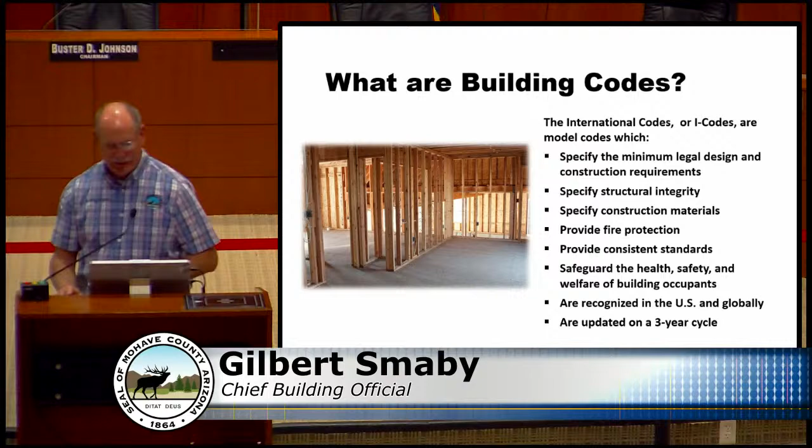Thank you for attending. What are the building codes? The county has adopted the international building codes.

We used to have the uniform building codes, and then nationally the I codes came into effect about 2000, with the first code in 2003.

The current building codes specify minimum legal design and construction requirements. They specify structural integrity, construction materials, provide fire protection, consistent standards throughout the building industry, and safeguard health, safety, and welfare for building occupants, and are recognized throughout the United States and globally.

They typically run on a 3-year cycle, so every 3 years the codes are updated by the I code family. And again, we're under the 2012 code currently.

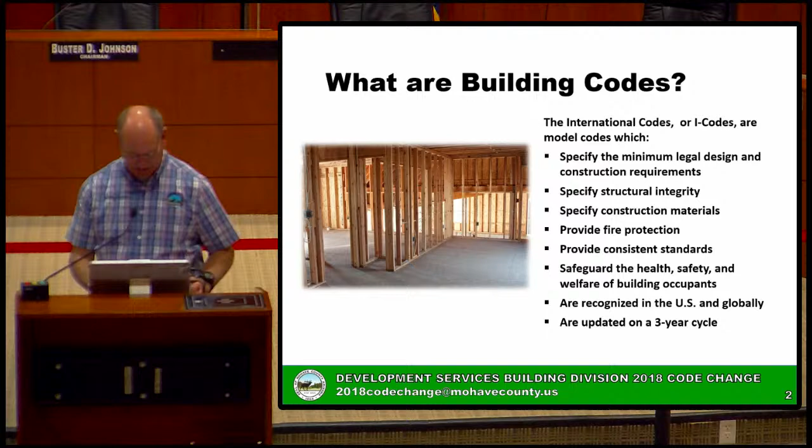Currently the county, Mohave County, is under the 2012 code. We adopted this code by the supervisors approximately May 2015, and it became effective for enforcement in June 2015.

We actually were on the 2006 code prior to this. The 2009 code came out, but with hard times in construction and the downfall of the economy, we did not adopt the 2009 codes. So we actually skipped a code from 2006 to 2012.

And again, we're looking to go to the 2018 code. There is a 2015 code that came out, and again, because of the complexity of going to the next codes and the cost, most jurisdictions skip at least one code. So we're going to go from the 2012 to the 2018.

Why should we change codes? Through the adoption of building codes, we can achieve lower insurance costs, lessen damage from fire and natural disasters, avoid criminal and civil lawsuits, and ensure the safety of family and business.

Another reason for changing codes is that most jurisdictions stick with the State Fire Marshal's Office for the state of Arizona. The State Fire Marshal's Office has notified people that they are going to the 2018 code within the first half of this year. So all the fire jurisdictions have to be on the same state code and can't lag behind. If we stay behind on the building codes, there are some conflicts and confusion between the codes. So again, most all the jurisdictions in Arizona are going to the 2018 codes.

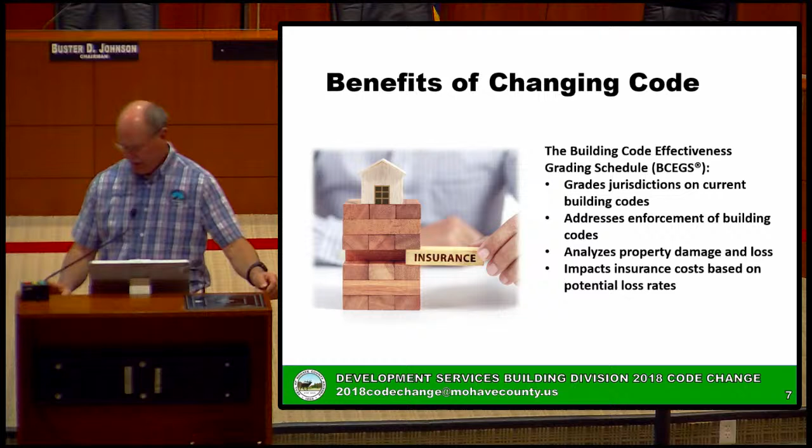The BCEGS rating also analyzes property damage and loss, and impacts insurance costs based on potential loss rates. Another aspect of the ISO rating, besides the BCEGS, is the National Flood Insurance Program, which conducts a community rating system. This rating system affects floodplain management and provides discounted premium rates for reduced flood damage and construction related to potential damage.

In the last 10 years, we received over $7 million in grant funding by having a low CRS rating and a low BCEGS rating, which affects that ISO rating.

What's our current ratings? On the BCEGS rating, 1 is the best and 10 is the worst. Mohave County currently has a residential rating of 4 and a commercial rating of 3.

We would have a rating of 3 in residential, although the state mandated that jurisdictions in Arizona can't require residential structures to be sprinklered. So by the sprinkler rating, we jumped up one rating from a 3 to a 4.

The CRS rating, or the floodplain management rating, is currently a 6. I believe we were just audited for that and received that number. We are yet to be audited for the BCEGS rating, which will happen later this year.

If we do not adopt the 2018 codes, the Mohave County BCEGS rating will increase to a 9 for residential and increase to a 9 in commercial. It will also increase 1 rating on the CRS rating for our flood control and our grant funding possibilities. So there's substantial increase if we do not adopt the codes.

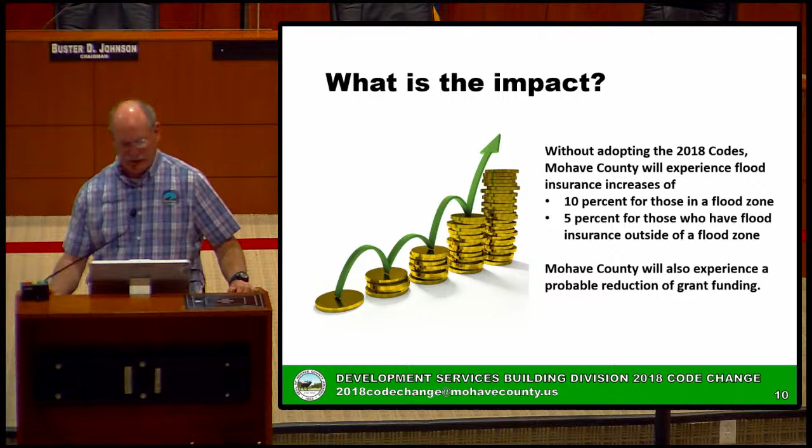When will the change take place? Again, the Board of Supervisors has directed us to start the process with community input meetings. With those meetings, we'll be compiling possible amendments and likes or dislikes of the code, and those comments from the public will be brought before the Code Advisory Board for a workshop and discussion with the public and the board.

We'll compile the possible amendments or recommendations from the Building Code Advisory Board and bring those to the Planning and Zoning Commission for their approval, and then later to the Board of Supervisors for their approval. If adopted, the new codes will take effect sometime in the summer of 2021, and a transition period will be established between the code change from the 2012 to the 2018.

Currently, we're getting requests from engineers and designers regarding some of the larger projects that are a ways out, 3 months, 6 months out, asking which code should they be on. So we'll have some type of transition period that will address the current code we're under and the past code we've been on.

We want to get into the significant changes between the 2012 code and the 2018 code. We've picked out the most significant changes we feel are important. This list you're seeing is not a complete list, but it is the most significant that we see.

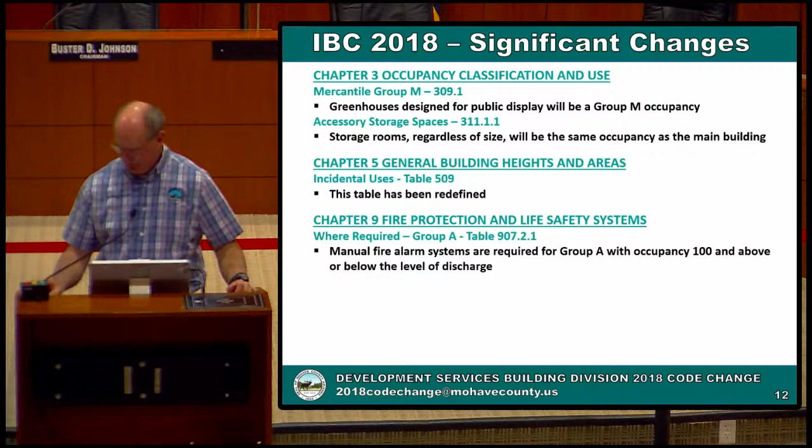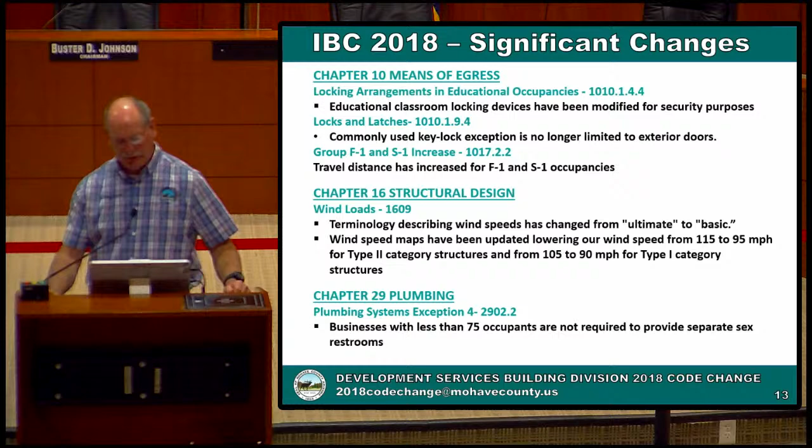Plumbing systems, there was an exception put into this. Businesses less than 75 occupants are not required to provide separate sex restrooms, which were required in the prior code.

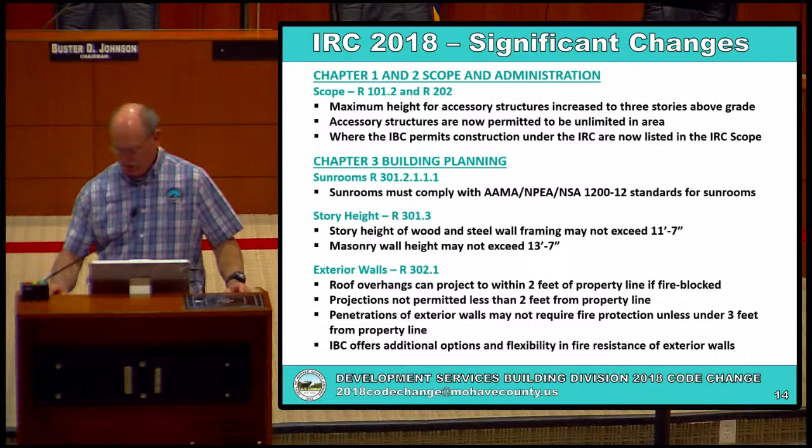Penetrations of exterior walls may not require fire protection unless less than 3 feet from the property line. So they redefined that, and the IBC offers additional options and flexibilities in fire resistance of exterior walls. They made some refinement of definitions in that.

Building planning continued. Smoke alarms: they've amended the code to allow battery-operated smoke alarms for alterations, repairs, and additions. Household fire alarm systems are no longer needed in an approved monitoring station.

Monitoring stations were brought in for congregate living facilities and some facilities that are under residential uses but are actually more of a commercial use, and they required a fire station and a fire pull station, and now that's no longer required in the code.

New provisions address smoke alarms near bathrooms and cooking appliances. That was silent in the last code.

And the feasibility exemption for interconnection of smoke detectors has been removed. There was an exception in the 2012 code that said if it wasn't feasible to interconnect or interwire the smoke alarms on any room additions or alterations, that was okay, and the code now has taken that out, so they need to be interconnected.

Some people have problems with this, thinking that the wiring sometimes isn't feasible, but now they have smart alarms that actually sense each other, and they don't have to be wired together, but they will go off at the same time, so it meets the intent of the code. I think that's why they changed this to require interconnection for all alarms.

Carbon monoxide alarms are now required to be wired to the house with a battery backup. Exterior work no longer triggers the provision in existing buildings. And attached garages require carbon monoxide detectors if there is access to the house.

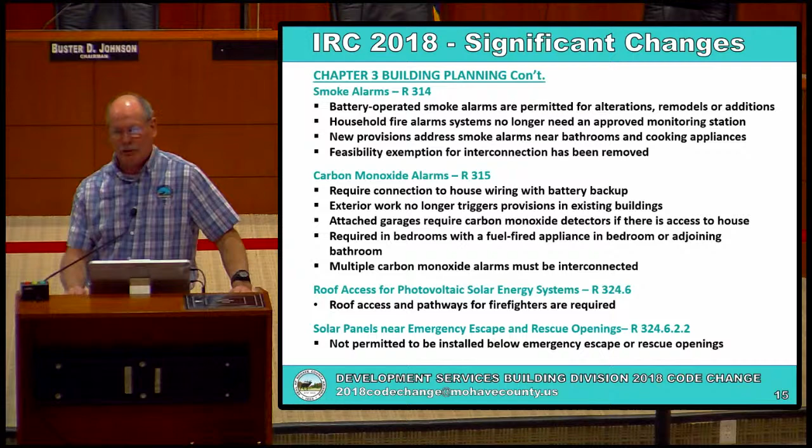So they've actually required an access space below the emergency egress windows on 2-story residential structures.

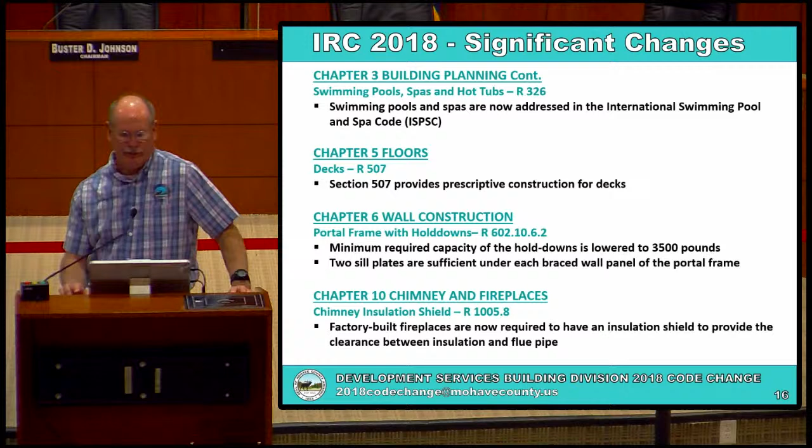Building planning continued. Swimming pools and spas -- there were actually two sections in the IRC that addressed spas for barriers, different types of construction, and locking mechanisms. In the '12 code, at the very end of the year, not addressed when the '12 codes first came out, they created a standalone swimming pool and spa code.

We never adopted that, but a lot of the larger jurisdictions did. So there's a whole standalone code book that addresses everything about swimming pools and spas. They took that out of the IRC and didn't address it since it's its own code now. Chapter 5 deals with floors.

There's been a whole provision of Chapter 5 put in for decks. The 2012 code and the 2015 code were silent on how deck construction was to be done. It kind of put it back to normal framing and construction methods, and it just didn't really fit a lot of cases. So they've actually revamped a whole new section on this.

It does address footing sizes, beam sizes and beam spans, types of materials you can use, and nailing schedules. So they've actually created a whole section just for decks alone, and it's a pretty good workup.

Chapter 6, wall construction, portal frame with hold downs.

They've changed this design in the code. This was a prescriptive design for wing walls at garages, and a lot of these walls could be brought down to 16 inches on both sides of the garage door with certain hold downs and certain header capacities. What they had was a 4,200 pound hold down bracket on both sides of the door, and they found out they can reduce that down to 3,500 pounds. So that bracket's been reduced in size with a substantial cost benefit, because those 4,200 pound brackets were pretty big and pretty expensive. The other change was the portal frame design - the 2012 code required 3 bottom plates on that design for those wing walls, and they've eliminated one of those sill plates, so now it's only required to have 2, with offsetting hold downs and anchor bolts.

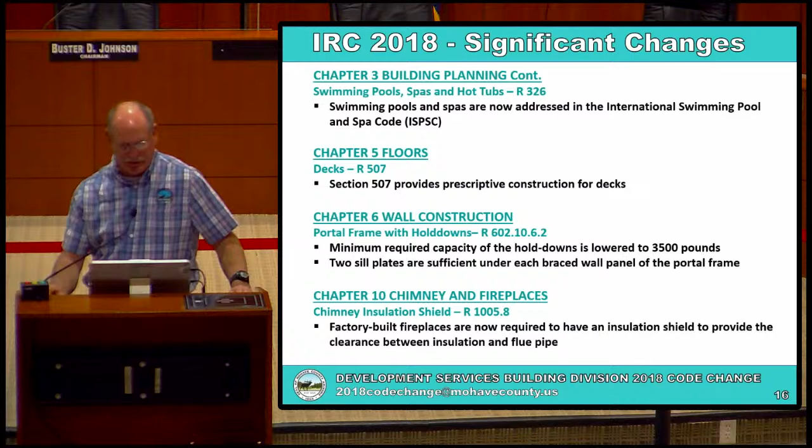Chapter 11 is the energy code portion of the IRC. We'll get into a little bit more on that in our amendments.

One new item in the code is an energy certificate required to be placed on the wall near a furnace, in a utility room, or another approved location in the house. The 2012 code did require an energy tag to call out the R factors of walls, ceilings, and windows, on a little sticker put in the electrical panel, so the next homeowner would know what type of energy compliance or materials were used. This one falls more in line with manufactured housing, where they require a certificate or placard in a cupboard that tells the climate zone and everything about how that unit was built. So this is just a change for a little more clarity and permanence down the road of telling you how your house was built and what energy requirements were done at that time.

For insulation and fenestration criteria, the code has added an alternate prescriptive method utilizing U-factor equivalents. This is something new in the code. We had a table in the energy code that basically called out prescriptively what your floor insulation should be, what your ceiling insulation should be, and what your wall insulation should be. This one goes a little further - all those R factors for insulation requirements actually have a U-factor rating, giving us an additional table in the 2018 code to evaluate whether you're meeting the minimum prescriptive requirements.

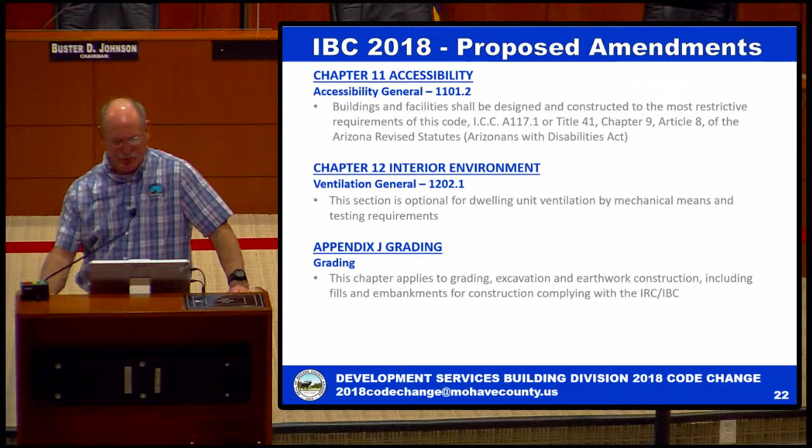Appendix J, grading - the building code has a complete section on grading and topography issues. Mohave County has adopted their own grading appendix, and we'll be using that instead of the appendix in the International Building Code for grading.

And that is the proposed amendments for the IBC. So that's all we have for the commercial code.

Next will be the International Residential Code, our proposed amendments. Work exempt from permits: accessory structures under 300 square feet are exempt, excluding utilities. That's a carryover from our 2012 codes.

Again, fences and block walls up to 7 feet in height will be exempt from building permits, and the measurement is from the bottom of the footer to the top of the wall. Another exception is manufactured home skirting is not considered as fencing.

Expirations, this is the same as the IBC. We just carried those over from the 2012 code as our expiration of permits in 180 days. Permits expired less than 1 year will require a new permit and half the permit fee, and permits expired more than 1 year will require full permit fee and new plans to be submitted.

Information on construction documents. We're requesting an amendment to require a minimum single-line drawing for plumbing and mechanical plans. Back in the 2012 code, when we adopted that, the Code Advisory Board made an amendment that plumbing and mechanical plans were not going to be required, and one of the reasons was the isometric drawings and the sizing capabilities of manual J calculations for mechanical, and also the plumbing, gas plumbing and water plumbing minimum size and velocities.

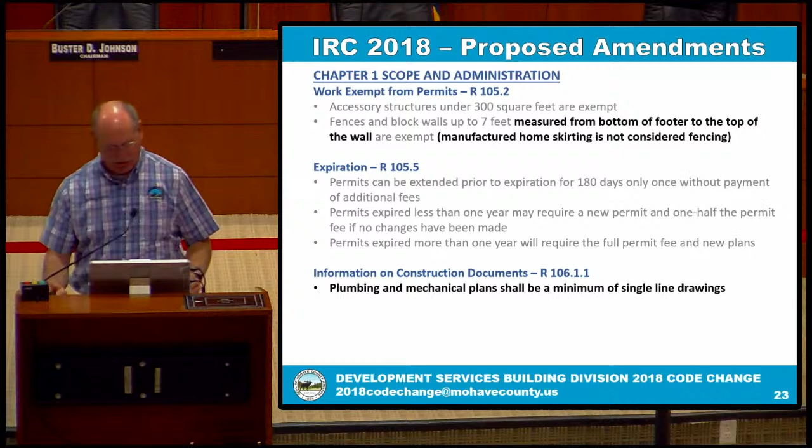Scope and administration continued. Again, this is a carryover refund, 80% of the permit fee. Standardized plan, we have a complete section in our ordinance, though there is no standardized plan section in the building code itself. We put this into our building ordinance, which gives you a reduction of plan review fee if you build the same structure over and over with no differences in the structure. So we have a whole section in our building ordinance for that.

Here we go, Board of Appeals and violations. Again, we have that already covered in our building ordinance.

Building planning, this basically was, there's a chart in the building code that has us call out our geographical area requirements and our design criteria. So this is, the chart's been added in there. We had to add into the table a 95-mile-an-hour wind zone. We're typically in a seismic C zone. So these are all just the design criteria that's inserted into that table.

Garage and dwelling separation. The code in the 2006 code required 5/8 type X gypsum drywall between the garage and the livable structure. When the 2009 code came in and required fire sprinklers in the house, they reduced that type of gypsum down to 1/2 inch. Our last board advisory committee, without sprinklers, amended that back up to the 5/8 type X for separation. That's again a carryover from our last code too.

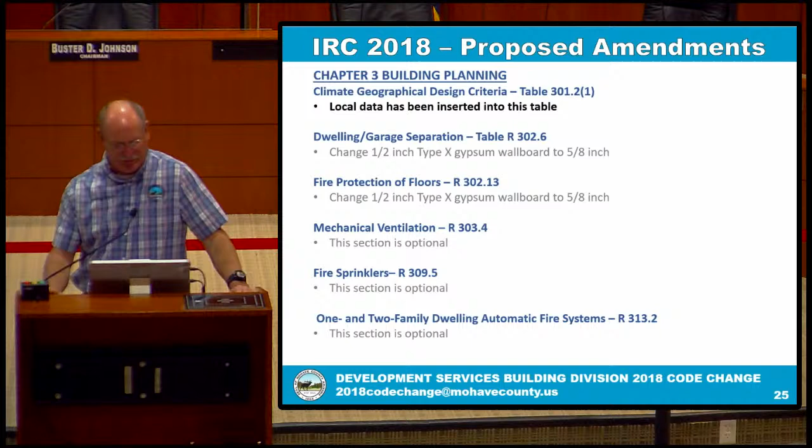Foundations for footings, we put an amendment in: residential detached sheds without utilities can be placed on pressure treated skids and anchored by approved engineered methods. These are structures over 300 square feet in size that have no utilities but are still required to have a permit, and most of these are coming with some type of engineered hold down system, augers, or some type of bolting hold downs to the ground.

Here's Chapter 11, the energy portion of the IRC. We looked at some of the energy requirements. One was the air leakage test, the blower door test. We felt for our area that should currently be an option and isn't required. Same thing with duct testing - they pressurize the ducting system and mechanical ventilation system, and that's a required inspection in the 2018 code, but we feel it should be an option. And then manual J calculation for sizing and efficiency ratings of mechanical systems - if you're not doing the other three, there's no reason to size the equipment for those tests, so we felt that was an option too.

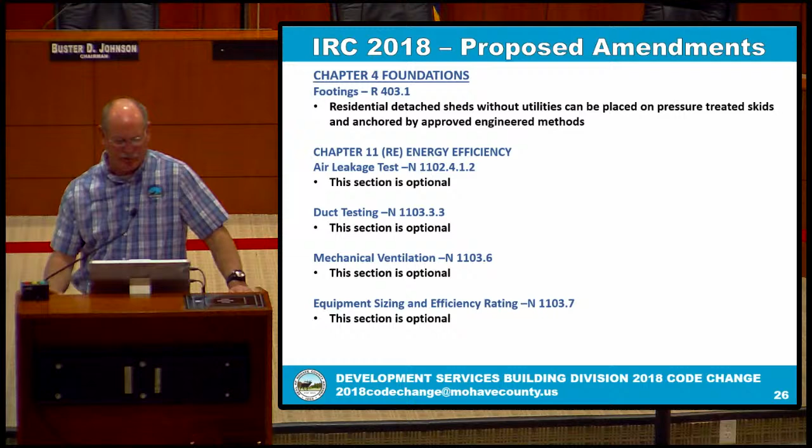Energy efficiency continued: pools and spas were in the energy section of the IRC. Again, there is now a standalone complete International Swimming Pool and Spa Code that addresses a lot of the pool and spa requirements, same thing with portable spas and swimming pools for residential spas.

Chapter 14, heating and cooling equipment and appliances, locking access port caps. I believe the 2009 code required this. Basically, on mechanical systems that had Freon systems, people were taking the caps off and sniffing the contents of the Freon for pleasure, and the code councils felt that was a problem, so they required locking ports that only mechanical contractors could access.

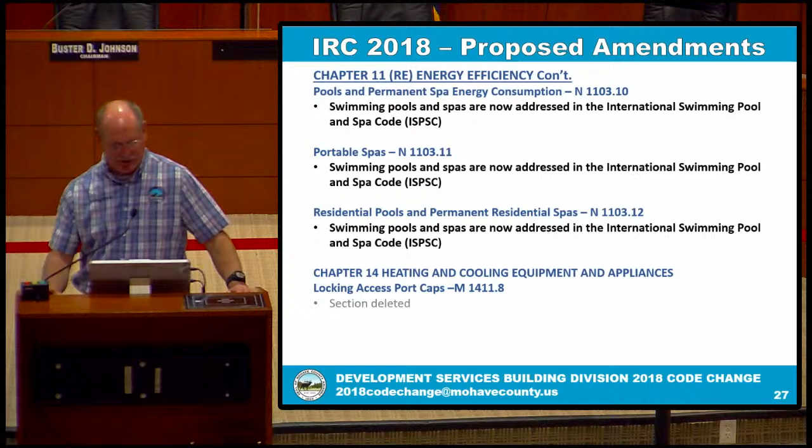Again, this is a carryover from our 2012 codes. Our Building Code Advisory Committee didn't feel that was necessary, so they deleted that section, and we want to continue that.

Chapter 24, Fuel Gas Code - actually fuel gas in the IRC - prohibited locations. Gas piping cannot be installed to a structure that is not attached to a permanent foundation, and we define auger type tie downs as not considered a permanent foundation.

Chapters 25 through 33 is plumbing, rough plumbing water test. The 2012 code and the 2015 code had the static underground water system on a pressure test of a 10-foot head height. That static pressure of 10 feet would show minimal leaks in the underground plumbing before it's buried under the slab. The 2018 code reduced that limit down to 5 feet in static head pressure height. We don't feel that's adequate to see the small leaks, so we want to amend that back up to 10 feet.

Plumbing systems in accessory structures - we want to amend that to say plumbing systems cannot be installed in a structure not attached to a permanent foundation. Again, the definition: auger type hold downs or tie downs are not considered a permanent foundation.

Building sewer - this is a carryover from our 2012 code that the sewer line should not be less than 12 inches below grade.

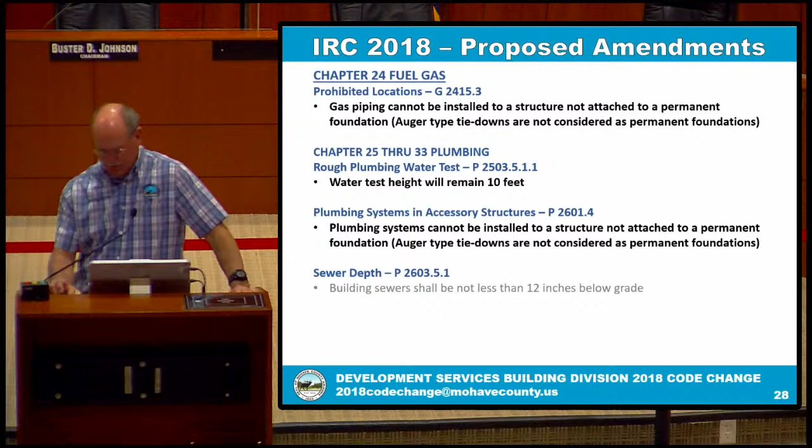Chapters 34 through 43 is electrical. This is a carryover from the 2012 code and we want to carry it too: a licensed contractor is required to install services over 400 amps.

Electrical systems and accessory structures - electrical systems cannot be installed in a structure not attached to a permanent foundation. Again, the definition is that auger type hold downs or tie downs are not considered a permanent foundation.

Arc fault protection - this section is optional. In the 2009 code, they required the whole house to have arc fault protection. Prior code was only in bedrooms, and they felt more bedrooms had cord type appliances than anywhere else in the house. But the 2009 code increased that to the entire house having that protection on the breakers. The Code Advisory Committee advised it back to bedrooms only, and that's the amendment we want to continue - arc fault protection for the whole house is now an option if they want to do that.

Tamper resistant receptacles were a requirement in the 2009 code. We didn't feel they're necessary, so that section is optional also.

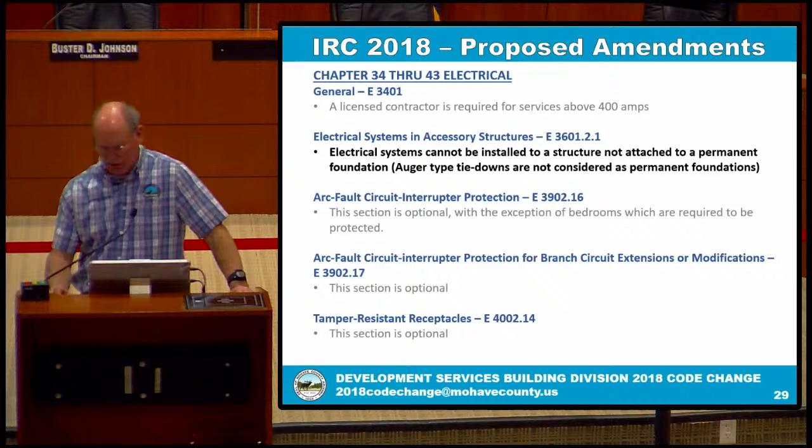Appendixes of the IRC. This is the new one. It was put in the 18 code, and it's basically tiny houses, so it's Appendix Q, tiny houses. And in this code, basically they tried to reduce clearances and requirements of the International Residential Code for single-family residences to accommodate tighter housing and tiny, smaller housing.

So some of the values in here were left blank, and it left it up to the jurisdiction to make those decisions. Some of them were put in by the Code Council themselves of having minimum requirements, and then we've also looked at, I believe, Coconino, Pima County, quite a few other jurisdictions that have made these amendments to the tiny house appendix. And this is what we're proposing, is a minimum 6'4" head height for habitable spaces, and that would be hallways, bathrooms, toilet rooms, and kitchens.

The current code requires 7 feet. Minimum loft ceiling height of 4 feet. Currently in the code, there's no requirement for any size of head height in a loft. And then obstructions cannot extend below the minimum ceiling height. The code did allow, if you had 7 foot, they would allow, I think it was 4 inches or something for pipes or beams to extend into that minimum ceiling height. In this case, they don't want that at 6'4".

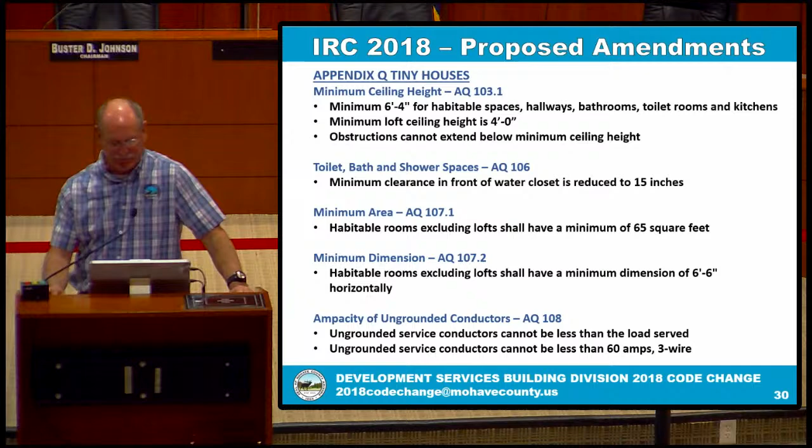Another amendment was that the service conductor for electricity has to serve what the load is of the house, and then any service to that tiny home cannot be less than 60 amps or 3 wires. Most houses are 200 amps and rarely 100, so that's limiting that down. And those are the amendments for the IRC, including the appendixes for the tiny homes. That's our proposals.

Now we're going to go into some of the other codes, fire code, plumbing code, mechanical code. So we'll start with the fire code. Group R occupancies, again, this is an option we're putting in the code where it was a requirement under the building code, but again, our state fire code does not require us to allow it. Fire sprinkler exception, again, we raised the size of the fire extinguisher from a 2 A10BC to a 3 A10BC.

Sprinkler systems, group A2, 300 occupants or more. This was a section put in that if you had an assembly occupancy that served alcoholic beverages and exceeded over 300 occupants, the building was to be automatically sprinklered. And there's a lot of provisions that allowed the buildings not to be sprinklered or have to have sprinklers. Some of the fire jurisdictions looked at that and said they really don't have a problem with that. When sprinklers are required, it does click in. So they didn't feel that the building had to automatically be sprinklered. There's other ways around that. So we side with that too, and we request to delete this section.

Special amusement buildings, this would be anything from, probably your basic one would be a haunted house at Halloween. They required that building to be sprinklered. So we don't feel that that's necessary, and so we want to delete that section.

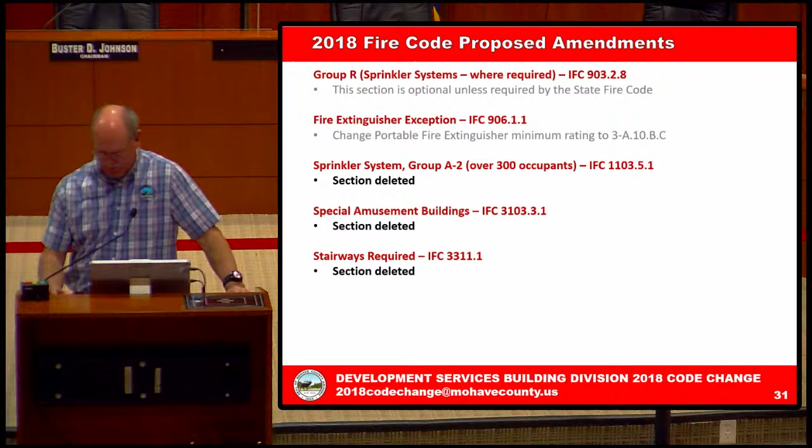And staircases required, this is a section where if you had a 60-foot under construction building, it would require a temporary secondary access of staircasing off the 50 foot of that building until the 60 foot was built or the permanent stairs were put in. So talking with, I believe, Kingman and Havasu, they didn't feel that was a requirement, and we very rarely get buildings over 40 feet in our jurisdictions, 40 to 50 feet. So we don't feel that would be needed, so we want to delete that section.

I believe that's the end of the building or fire code requirements or proposed amendments. Mechanical code proposed amendments are, we have our fee schedule, our violations, and our means of appeal. Again, those are all already covered in our building ordinance. We just want to clarify that as an amendment in the building code. And the refrigerant circuit ports or the locking ports, we want to delete that section. I believe that's the only mechanical proposed amendments.

Plumbing proposed amendments, again, we have our fees, our refunds, violations, and a means of appeal.

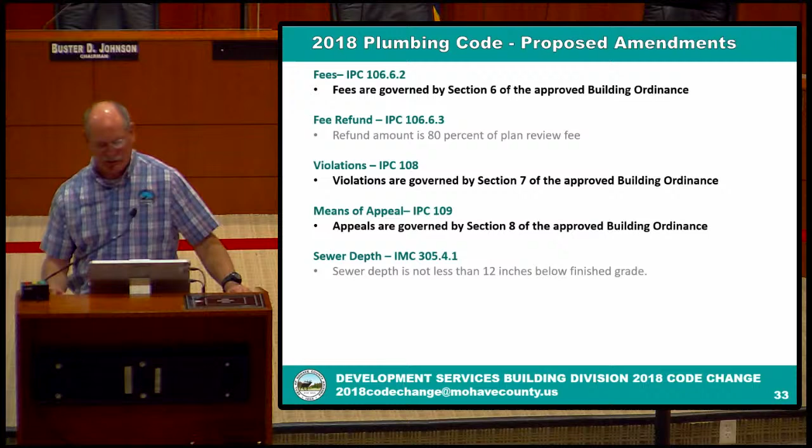Those are already covered in our building ordinance, just for clarification. And sewer depth is a carryover from our 2012 code, no less than 12 inches under finished grade. So, electrical code proposed amendments.

Carried over from our last code, a licensed engineer's stamp is required for electrical panels 600 amps or above. Arc fault protection in dwelling units is optional for the house, but bedrooms will require arc fault protection. Tamper resistant receptacles are optional, including in multifamily dwellings. I believe that's the only electrical code amendments we have.

Fuel gas code proposed amendments. Again, we have our fees, refunds, penalties, and means of appeals. All of these are already addressed under our current building ordinance.

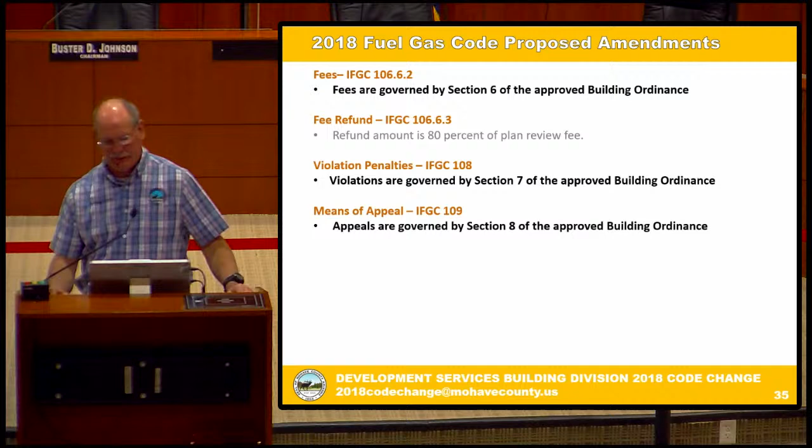Energy code amendments, this is the International Energy Conservation Code. It's a standalone energy book used for commercial and residential applications if they use the performance methods. As stated, the IRC or residential code already has a chapter 11 that calls out minimum standards for energy efficiency, R-factors for insulation ratings and window ratings. This code goes a bit further into a more performance-based method of gaining energy compliance.

We don't want to adopt this part for the residential code of the IECC, as we already have Chapter 11 addressing it, but we do want to amend that we'll be using it for commercial. It's pretty standard; most commercial applications are already utilizing the Energy Conservation Code.

Fees, stop work orders, and means of appeal. Again, these are already covered in our building ordinance, so we just want to clarify that.

Pool and spa code proposed amendments. This is a new standalone pool and spa code. The IRC had sections addressing certain things like barrier heights, pool depths, and construction requirements. This standalone code now addresses all of those in its own entirety.

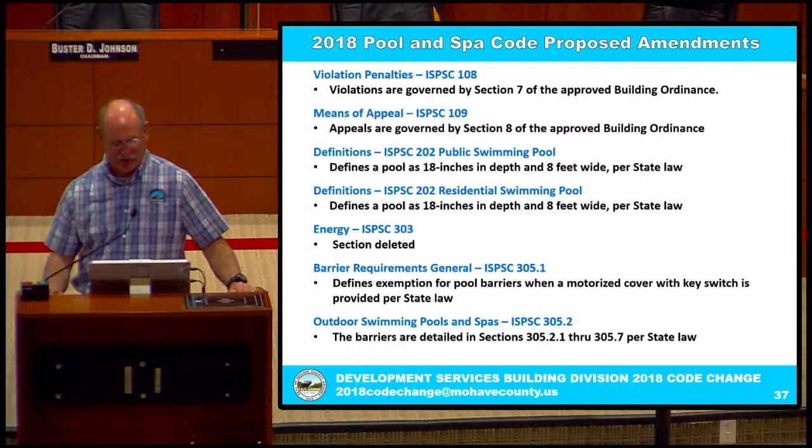Heights, barriers, and clearances: state law defines openings, handholds, and footholds for chain link fences in more detail. Gate requirements, double gate requirements, latches, and barriers are also addressed, making those barriers more restrictive than the regular code.

Property maintenance code proposed amendments. We utilize the property maintenance code for dilapidated and dangerous buildings under our dangerous building program. Any fees or costs incurred by the county to abate one of these structures, we put on as a property lien. So we have to spell that out as an amendment in the code, that we're not using a criminal offense—it can be a civil offense—and we're actually using a property lien method.

Weeds in there was a blank, left for the jurisdiction to fill in, so we set it at 30 inches of weeds. Usually when we go to a vacant property with a dilapidated building, we'll address the weeds along with it if they're 30 inches.

Same thing with inoperative vehicles. The property maintenance code basically says it's not legal to have any on the premises, but we want to make an exception as allowed in other regulations. Our zoning ordinance does allow outdoor or open lot storage, so some inoperative or unlicensed vehicles could be covered and still be under state or county requirements. So we wanted to amend and clarify that. But this property maintenance code is what we use for dangerous buildings and their abatement.

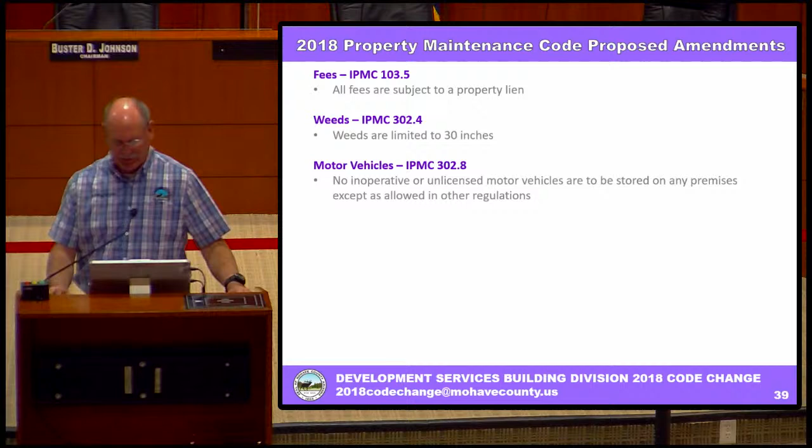And that concludes my presentation of our amendments, our significant changes, and possible adoption of the 2018 code. If you have any questions, feel free to ask.

Who actually sits down? He's got a mic for you.

Who actually sits down and writes up these proposed amendments? The proposed amendments came from our building department, working with looking at other jurisdictions and their proposed amendments also.

Okay, but that's who sat down and wrote up the amendments. Now the 2018 code has already been published, right? It has been published. We're in the process of deciding how much, or whether we even want to adopt the 2018 codes and the proposed amendments at this point. Correct. Okay.

When is the workshop going to convene, sometime early February, is that what I heard last time? I believe it's the first week, the 10th of February. So what we'll have, and I should have gone into it a little bit, we have some cards, we have some input that you can give us.

I saw the cards. What I was getting to is the workshop. Who can attend the workshop? Anybody, out of our 5 meetings, that's where everybody can get together with the board and the Code Advisory Committee.